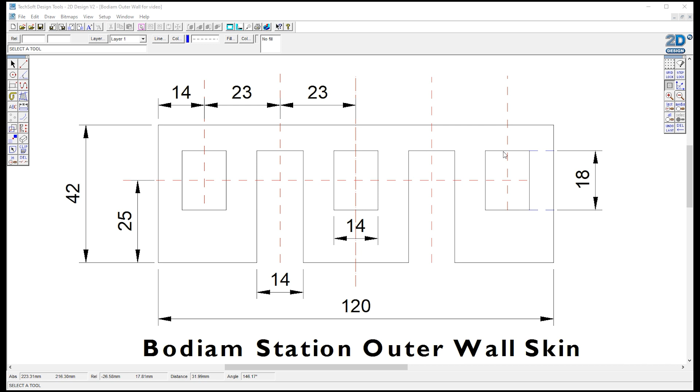Okay, so I've imported that drawing into LibreCAD and we'll have a go at recreating it. The first thing we'll do is create the outer rectangle. Now there's a couple of ways of doing this. I'm going to use the method I showed you last time.

So I'm going to select a vertical line tool first of all. I've already preset the length to 42mm, which corresponds with the height of the building, and I'm just going to drop a line in here. I'll roughly line it up with what we've got above. I'm then going to choose my horizontal line tool, and we're going to put the width of the building in, which is 120mm, and we can pop this on.

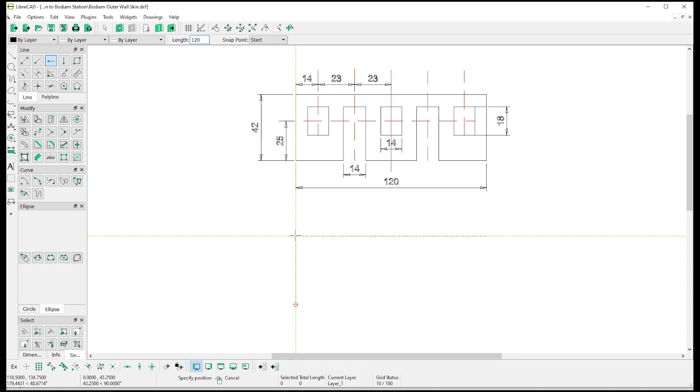Now if I zoom in, we can try and line it up, but it's going to be inaccurate. Remember what I said previously, we don't want to do anything that's inaccurate. So in the bottom left hand corner I'm going to choose the tool Snap on Endpoints, and that will allow me to snap precisely on the end of that line. In fact, I can do the same down here as well.

Okay, I'll go back to my vertical line tool, and that's the rectangle drawn. Now that might seem a bit long-winded and convoluted, but it's a lot quicker to do it without talking about it.

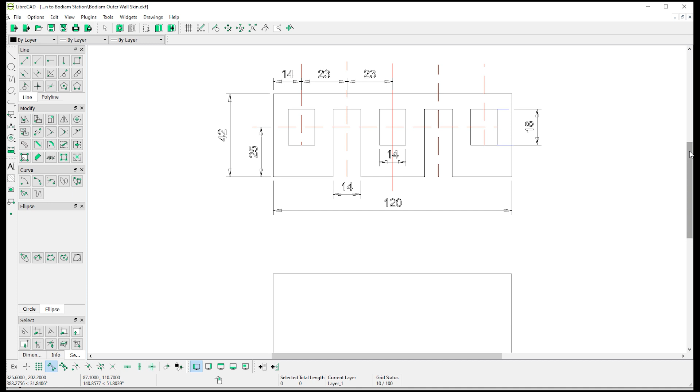Okay, the next thing I think we'll do is consider these vertical centre lines that run down through the centre lines of the windows and these doors. And I think to do that we'll use the offset tool.

So for this next part of our drawing, we'll create these centre lines, and we'll do this by changing the line colour and the line style to this dashed line. The line colour can be found here in this little drop down menu, and we'll choose red. And if we look here, line type, down here we'll go for a dash.

Let's go for small dash. Let's offset this vertical line by 14 millimeters. First we select that line, and it becomes highlighted with the dashes. Come to the offset tool, select it, and in the distance field at the top of the screen we need to make sure it says 14 millimeters. Hit enter, and at the bottom of the screen it specifies direction of offset, so we can go left or right.

Whilst we're at it, we may as well select the right hand line and offset it. We've already got that distance programmed in because it remembers it from last time, and we can put a direction of offset in like so.

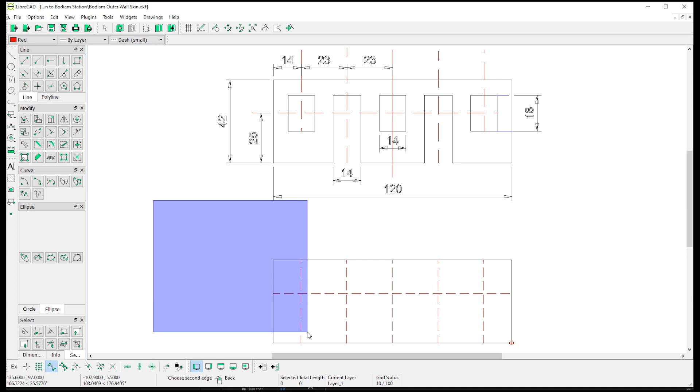Let's select that line, use the offset tool once again, and offset by 25 millimeters. And there we have it - we've got the basic geometry for our building all drawn up. That didn't take long.

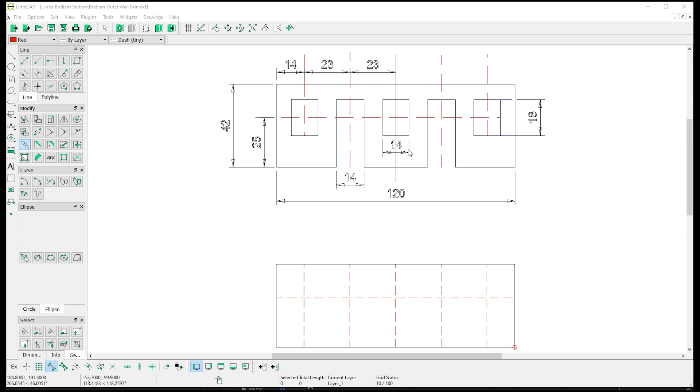The next job is to recreate the window and door openings on our new layout. We'll begin with just the centre window, which is 14 millimeters wide and 18 millimeters high. If I zoom in, this is our centre point for the vertical axis, and this is the centre line for the horizontal axis.

Before we draw anything, I'm going to change my line colour back to black, and change the line style to a straight continuous line. I'm going to select this line, hit the offset tool and set an offset distance of 7 millimeters, and select the direction of the offset to the left of that vertical centre line.

We can repeat that process by highlighting that centre line, hitting offset - the distance remains the same - and specify the direction of the offset to the right. So that's got our vertical sides of the wall, of the window.

What we now need to do is put the top and bottom in. The window is 18 millimeters high, so it's 9 millimeters above and below this horizontal centre line. I'm going to select the centre line, hit the offset tool again, put a distance of 9 in, and select above the line.

I can repeat that process below the line, and there we go. We've got our basic line drawn, but we've got some excess pieces of line which we need to trim away. So let's recover how we do that.

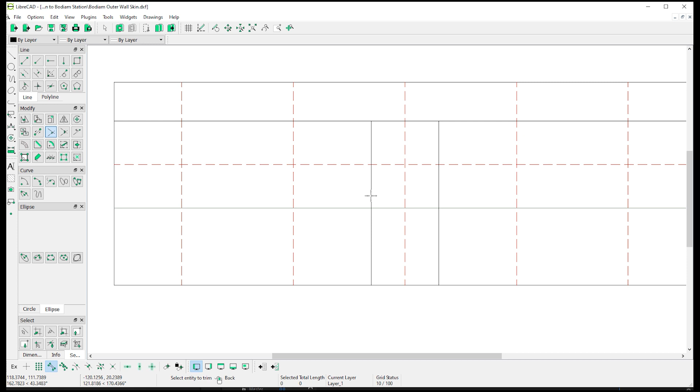So we can now trim by the bottom, selecting this as our limiting entity, and we can select those two lines and trim those away. This is a process we can repeat to trim away all of the bits we no longer require. If I zoom out, we can see we've got our first window complete.

Having created one window opening, we don't need to repeat that process. What we can do is use the copy tool to repeat this one over here on the left, and over here on the right too. So I'm going to select those lines by left clicking and dragging a box over them, and now under the modify menu we have the move/copy command.

If I select that, down the bottom here it'll ask me to specify a reference point. So what I'm going to do is choose this snap tool here, snap intersection, and deselect the endpoint tool. I'm going to choose the intersection of this horizontal centre line and this vertical line. Having done that, I'm presented with a little red circle on the intersection, and down the bottom it asks me to specify a target point.

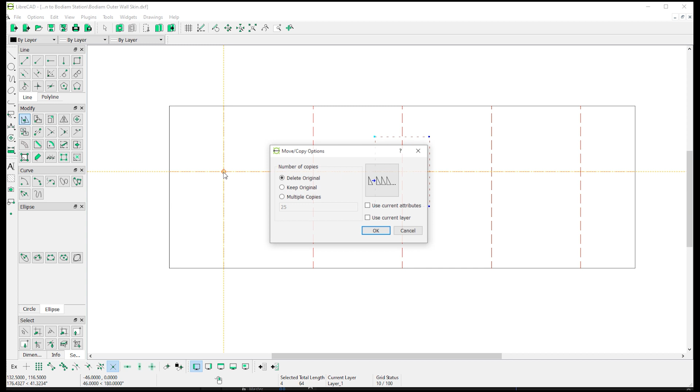Now I can specify anywhere I like, but I'm going to keep that intersection tool locked in, and I can drop the window there. At this point it asks me, do I want to delete the original, in which case this would be a simple move command, or keep the original and produce multiple copies, in which case it will just keep tiling these across the screen. In this case I want to keep the original, so I select that and click OK. Now I've got two windows.

That may seem a long-winded explanation, but it's actually quite quick once you've got the hang of it. Okay, let's have a look at the door next.

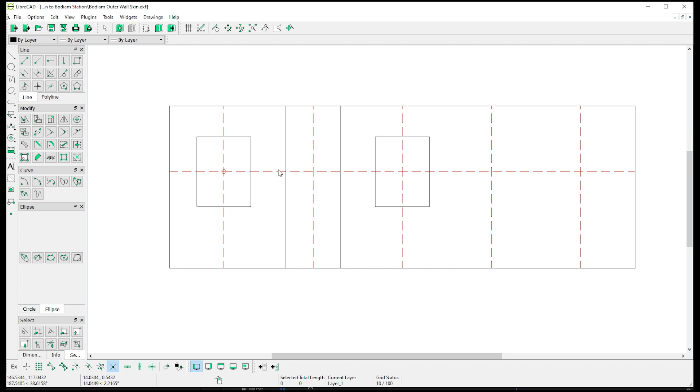For the door, I'm not really going to talk you through this much, I'll whiz through it as quickly as I can. It's just using the offset tool, same as we did before, with the same offset distance of 7mm. Oh, I've done that wrong, I specified it on the wrong place. Let's do that again. 7mm, this time I want to come to the right of there. Now I select that line, offset 9 above.

And I can use the trim tool now, just as we did before. Did that wrong, let's do that again. Trim away those two lines, and we're going to trim this one as well.

Okay, so now I can select that door. I can use the same copy command that I did previously, and I can keep going, and put that window in as well. However, on this occasion I'm not going to do that, and in fact I'm going to delete half of the window that I have previously drawn.

So I can show you another tool. Now I've got one window here, I've got my left hand window, I've got my left hand door, and I've got half of this centre window.

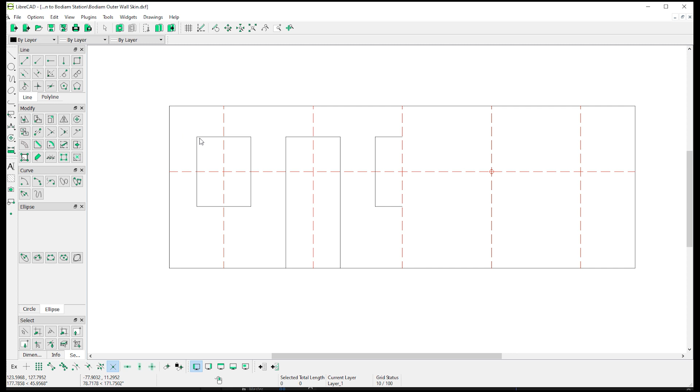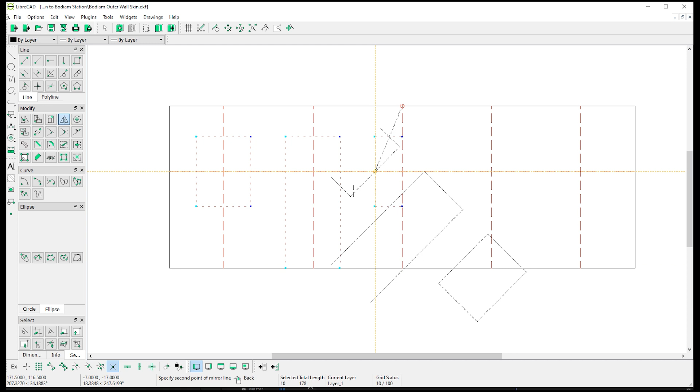So what I'm going to do is select those, and choose the mirror command, which is this one here. Now it asks me to specify the first point on the mirror line, which would be this intersection here. I've still got my snap intersection tool on, so I can snap there. Down the bottom it asks me to specify a second point on the mirror line, which would be the bottom of this vertical axis.

Again, it will ask me, do I want to delete the original, in which case it would be a kind of mirror and a move, or keep the original. So I want to keep the original. Click OK. And there we go, there's our front wall of our building drawn.

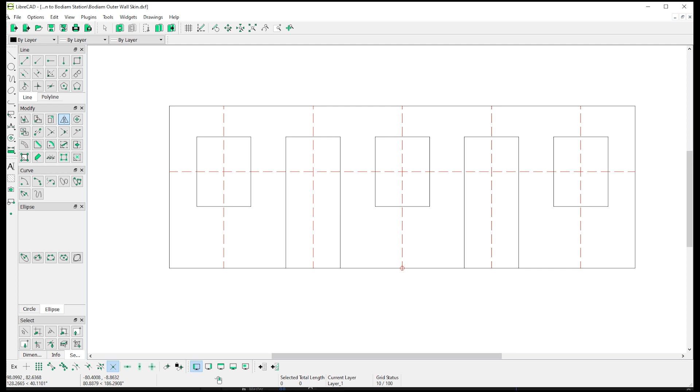So then, by way of a recap, in this episode we've looked again at drawing horizontal and vertical lines to a given length. We've looked at the offset tool quite extensively and how that can be really useful in creating parallel geometries. We've also looked at the move tool and the mirror tool, as well as revisiting the trimming tool.

So there's quite a lot there. It's worth going back, reviewing the video several times, but more importantly, having a go at drawing yourself. Practice these skills because they're fundamental to everything that's going to come in future.